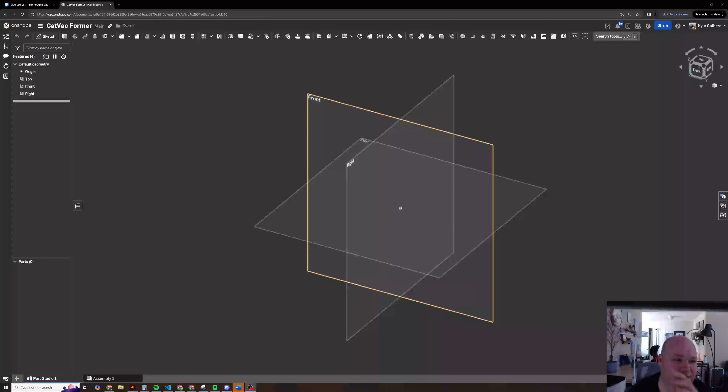Okay, so I'm recording myself. I'm going to model a vacuum former for the visors for the astronaut helmets. So I guess I can show you what those look like.

Alright, so if we go to the helmet assembly, so this is the visor. Oops, kind of see there.

And I guess I could pull some dimensions from it. So from side to side, it's going to be roughly 10 inches, and from the top here to the bottom here, it's about 12 inches. So in order to get a big enough bed that we're not right up against the edges, I'm probably going to design the vacuum former to be about 2 by 2 feet. That way, if we want to make them from smaller sheets, we can window it down. But if we want to make potentially 2 at a time, we should be able to do that with a 24 by 24 bed.

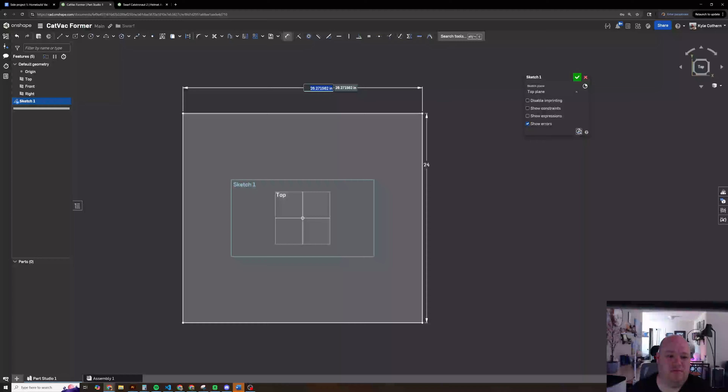So first thing I'll do is I'll model up the sheet that we would be forming. It's pretty easy, it's just a 24 by 24 by up to 1/4 inch sheet. So this would be 24. And then check that off. Extrude.

So this is the size of stock material that you'd be making it from, to give an example. There we go, we'll go ahead and change the material, make it polycarbonate.

Okay, so now that we've assigned the material, we can get the basic properties. So it weighs about 6 pounds, it's about 144 cubic inches. Cool, so it's pretty handy.

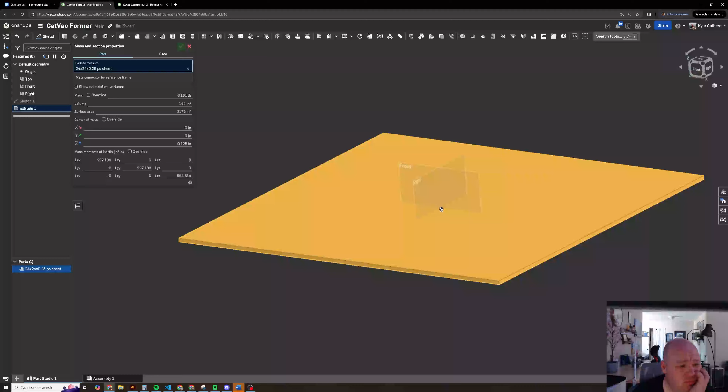So the first thing we need to do, if the material sheet is this size, we need to clamp it on the edges somehow. I guess we should put together some of the requirements for this. So I started a tab on this already. This will be how big of a sheet it can accommodate. We'll probably do a few different materials, and then we'll go up to 1/4 inch thick.

This could be thick enough that it needs to be heated from both sides so that it doesn't sag, or so that it gets thoroughly warm. But then if you have to heat from the top and the bottom, it can sag into the heating elements when it gets to the right temperature for forming. So some higher end commercial vacuum formers will actually pressurize the bottom side to take the sag out. That means the whole bottom enclosure has to be pressure tight though, which is maybe a little bit more than I want to do right now. That's going to add a substantial amount of heft because that's going to be a pretty big volume that you would have to enclose.

So I'm probably going to try seeing how thick I'll make it to where I can hold a 1/4 inch sheet, and we'll see whether or not I can get away with it when I'm doing the actual forming.

The other thing that's tricky with polycarbonate is you really need to dry it out before you form it. So usually when you do that, you want to hang the sheet vertically, like from the top edge, and put it in an oven. But I don't really have an oven that can fit a sheet like that. Or, well, I do, but making the fixture to hang it and everything is kind of a pain.

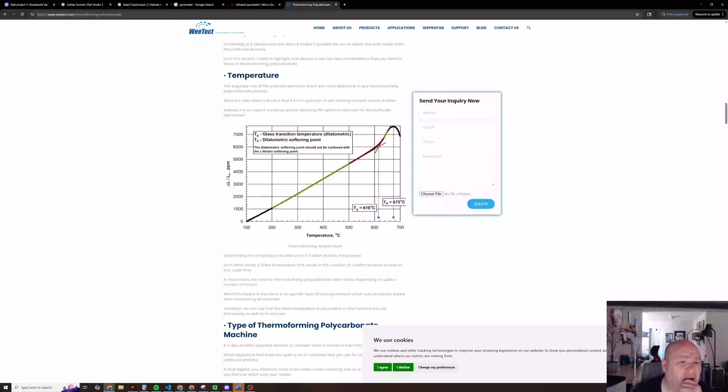So pre-dry should be 125 C, it says. Trapped moisture tends to form vapor above 250 F, making the vapor expand and create bubbles in the sheet. Dehumidifying air circulating oven. Okay, so we'd have to have some kind of fan.

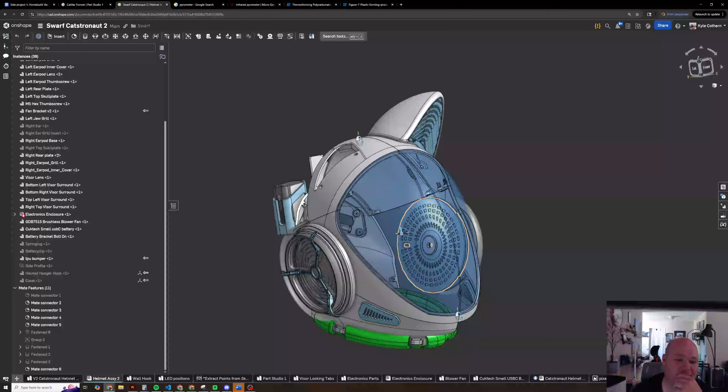To figure out the max mold weight, I'll just assume that this visor is one of the bigger things I'm going to be doing, which might be a bad assumption. But I'm going to make it anyway because I really don't want to over design the crap out of this thing.

So I made - oh, this is a different vacuum former. I made a mold volume, I think, at one point for the visor. If I just turn everything on, it'll probably show up. That's the lens, so this is how big I think the volume of it would have to be.

And I think it's like, let's see, it's like 15 by 15. And that's plenty big, so 24 by 24 is kind of overkill, but I think it's one of those things where if I'm going to go through all the process of building a vacuum former, I might as well make it big enough to do other stuff on it.

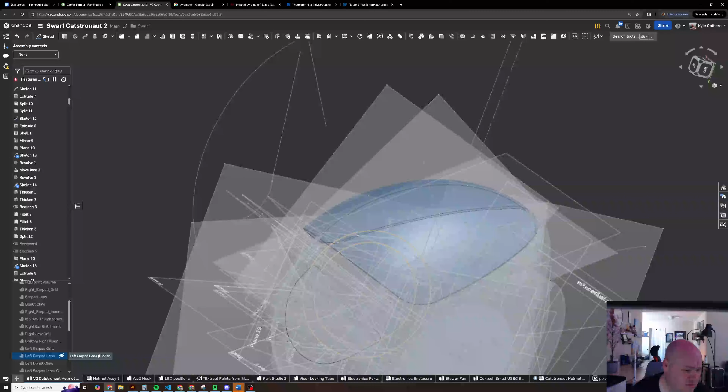Let's see here. I wonder if I can just show all parts and find it, maybe. Got a bunch of random volumes. Oh, maybe it's not in this one. I might have never made it for this one.

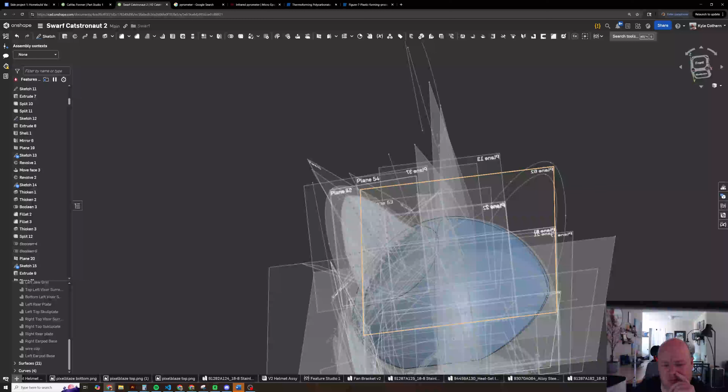Well, that's fine, I could just make a new one really quick. So what we'll do is turn everything off except for the visor, because there's a lot of stuff going on here. Hide other parts, go ahead and hide all the planes and hide all the sketches.

There you go. Here, for some reason, this must be like a composite curve or something. Hide all the curves - thought I hit all the planes. Must just be freaking out. Okay, so what we can do is we can make a... oh, I guess this isn't... well, that's kind of annoying.

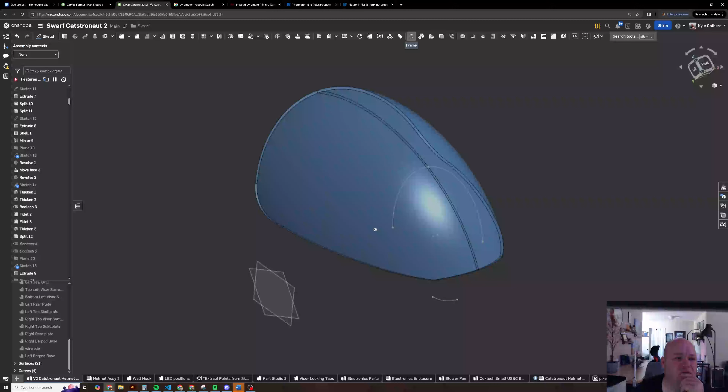So you can make part studios in context in here, but you have to be in an assembly. So one of the things - making assemblies and parts different is one of the things that's really unfortunate about both SolidWorks and Onshape.

Because when you have different file types, you basically immediately have this really awful problem, the fact that a lot of parts turn into assemblies and assemblies get merged together and turned into parts, and transitioning back and forth between those can be really hard if you've built up a pretty big feature tree and then you realize this needs to be a weldment. You pretty much have to start over in programs like this. In a program like NX, you can just merge them all together and a part is an assembly, so it doesn't matter, you're just done.

But it also makes it harder to do things like when you're cutting a hole through multiple parts, like match drilling something, which is very common.

Controlling that hole across the parts means you need to establish a new assembly context for a part. The way it works in Onshape is it's managed on an individual context basis, and you can update each context manually.

I don't know if any CAD program does this particularly well, but NX at least has something called WAVE link geometry, where you can do something like that and then break the link. That way you won't have someone accidentally update a WAVE linked assembly and have it cascade into all these other parts you weren't paying attention to.

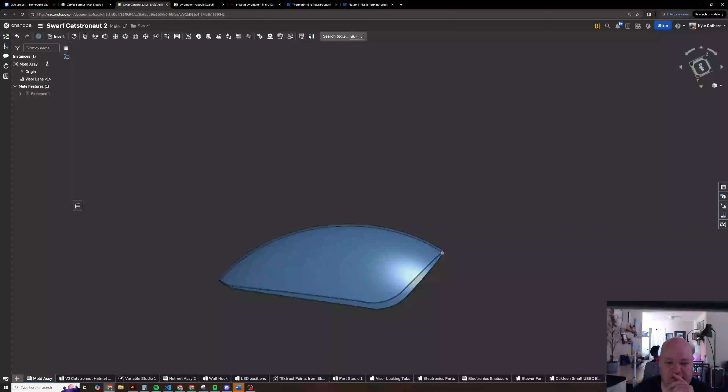So now that we have an assembly, we'll call this mold assembly. And since the vacuum former is kind of different from the helmet itself, I'm going to just make the mold in the Catstronaut file, then go back later and do the rest. So there's one question of where you put the flat part.

Like I could have it to where gravity down on the mold is this way. But usually what you want to do is find the center of whatever the biggest arc is and then go normal to that. That way it would be more like something like this.

The reason you want to do that is the plastic doesn't have to stretch as much, usually, if you're doing that. And the thing is, when you go to mold the plastic, it's hot so it yields and moves, but there's still some Poisson's ratio stuff going on where it wants to thin out in places seeing higher stress. Then you get an uneven thickness and optical aberrations effectively.

So it'll look kind of watery or wavy through the thin spots as they transition to the thicker spots. For something that needs to be optically clear, where you want to forget it's there, that's not good. So the smoother you can get the surface, and the more even and consistent the material thickness throughout the part, the better off you are.

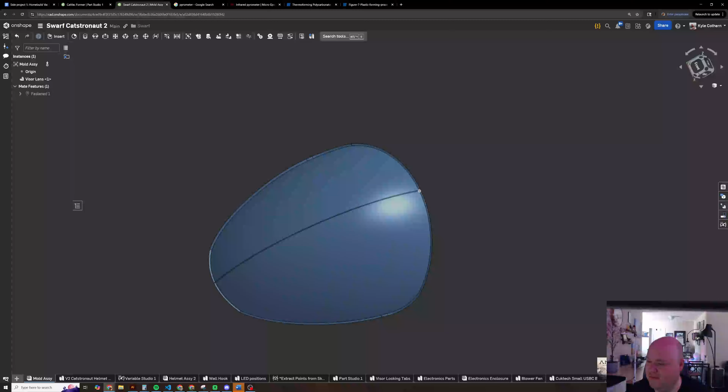So you kind of want as little stretching as you can get. Some things that can help: if you pressure form, it can do better at maintaining uniform thickness. Probably also really even heating. And I imagine your fixity method matters a lot—like if you're just grabbing on four square edges versus something more conformal to the actual shape of the visor, with additional material where there's going to be more stretch, that's probably what you want.

Okay, so to get that normal vector, I think I'm going to sketch. The first thing I have to do to create a Part Studio in context, usually you want to make a mate connector for that so you know what it's attached to. This one will be fine. And then we'll go ahead and create a Part Studio.

Oh well, I just did all that, so there we go. All right, so you can kind of see there's this ghosted version of the visor now. So I'm going to go ahead and sketch on the right plane here, and we're going to grab that curvature by using this edge here.

Look at that, it created the context. Great. So one of the kind of cool things about the constraints here is they have one that's just normal to curve, I think.

So we want to find the midpoint, which is probably like, whatever. We can just draw a line, and then we can just take this and say that it's midpoint of this. Midpoint. Oh, come on, this guy.

Oh, that's like a spline. They got me, nailed them. What about this? Pierce, we pierce that. Oh, some of the entities cannot be used.

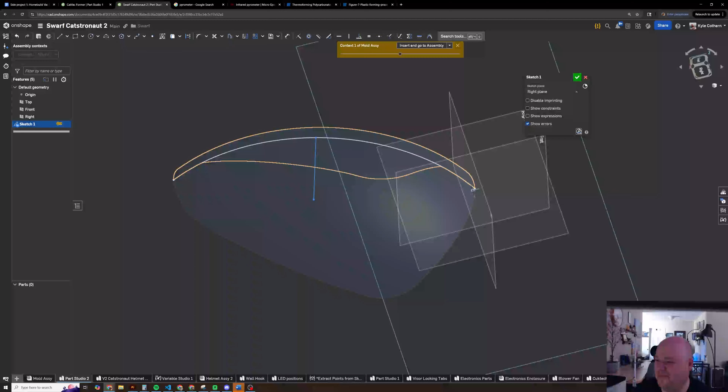So one problem with Onshape is it treats splines as a different class than lines and curves. In most CAD systems that are non-uniform rational B-spline based, a curve, a line, a point, it's all just represented as a Bezier curve. So like a spline is a spline, is a spline, is a line, is a curve, is an arc, is a circle, is a whatever. Like they're all defined the same way.

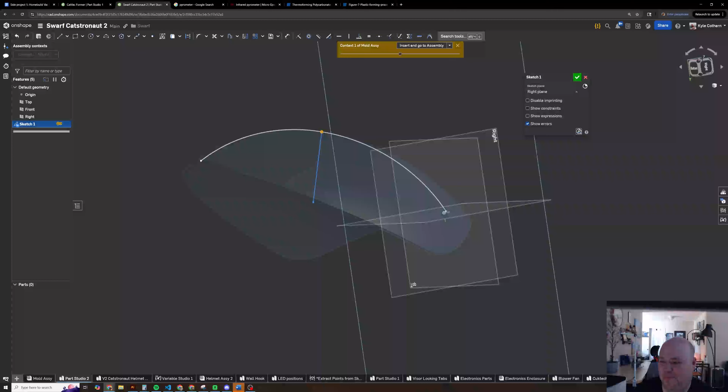Onshape has a different class of geometry for a spline surface, like anything that has complex curvature, versus just a 3-point arc, a curve, a fillet, a circle, a chamfer. Like all those are considered lines and curves, and then splines are this totally different thing. And a lot of the constraint methods and sketches and other stuff doesn't work on splines. It just works on lines and curves, which is frustrating as hell because I know exactly what I want to do.

So I can make this normal, like that works. But then if I want to grab the midpoint - and the thing is, a spline has a midpoint. Like, why can't it calculate the midpoint? Great question, come on guys. And the worst thing is, I could probably even - so yeah, it won't do a midpoint between those two.

So I could probably even just come in here and make a 3-point arc that very closely approximates this. Look at that, it's pretty close. And then I could just take the midpoint of that. But then that's not the real midpoint, which is really annoying. So there's the midpoint-ish, we could do that. So then this is like roughly the normal vector of the midpoint of this.

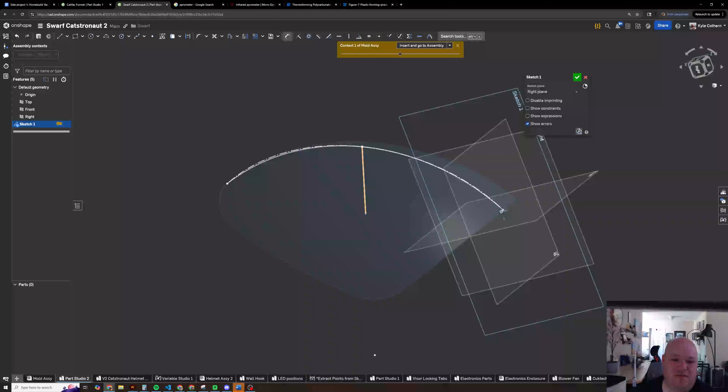And so what that lets us do - I'm going to go ahead and make the fake one a construction, just so I know it's not the real one. But what that's going to let us do is now I can set an offset distance. So let's say, I don't know, we want to go maybe an inch past that edge there.

So actually I'm going to kill that. Then I'm going to come down here and basically take a perpendicular line that is coming right to that edge there. So I think I can grab this edge, and I know it's a spline edge, but I should be able to do it coinciding. Oh man, see, so stupid.

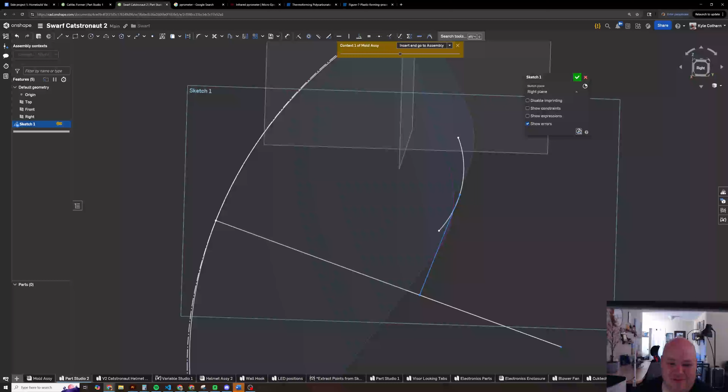It's like beyond stupid. Anyway, so it did something to attach it. Oh yeah, there we go. Okay, so I kind of have to - I wonder if I can make it tangent. That would be nice. Oh yeah, there we go.

Okay, so now we have some construction geometry here, so we can say, okay, how far off the bottom are we going to be? And I'll just go ahead and make this like, I don't know, let's make it 1.5 inches maybe. Yeah, that seems like enough.

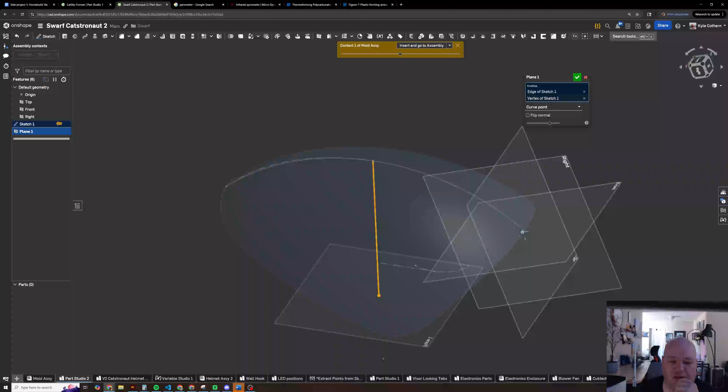Okay, so if we were to look at this dead on from the side, you can kind of see we're like 1.5 inches down. So we're going to go ahead and make a plane on that point - or sorry, actually I want a curve point. So like this is my curve, this is my point, and look at that. So this would be the plane of the base of the mold.

We can go ahead and sketch on that, and we can project these curves down to it of the edges of this guy. We actually want to make sure we get the actual edge curves and not just the interfaces, because there's actually a little edge face that would be pointed down. You can see my curvature is not entirely continuous, there is some interruptedness to it.

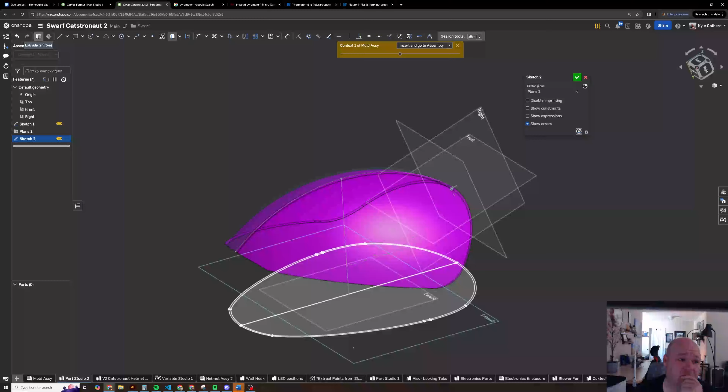Okay, so there's my base. So what I can do now, if I go ahead and check that box, I can extrude this base up.

It's probably a faster way to do some of this, but I'm just going at it. All right, so 1.5 inches. So this is just touching the bottom, right? Usually you want it to be... I'm trying to think. So like if we go to 1 inch, right?

We can do something a little bit interesting. So we'll go to 1 inch, and then, oh, I missed this segment. My bad. There we go. So if we go to 1 inch, we're the same size as it right now, but we probably actually want to be a little bit bigger.

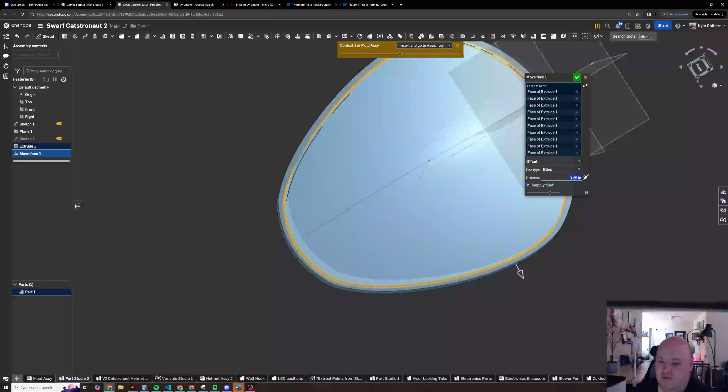So we can use, this is like synchronous modeling stuff, like we can move faces. So if we select all the tangent faces, if we make it like a 1/4 inch bigger or something, that just gives us some trim margin. So basically you want there to be a clear edge that you trim off, but you still kind of want a smoothish profile, because if you don't have some kind of draft or something like that, then it gets stuck on the mold and it drags when you try to pull it off, and it scratches the inside of it basically.

So we'll go ahead and offset that. And, oh God, what's this? This is like some kind of sliver bullshit going on here. I don't like it. I don't like it. What's wrong with you?

Is there like a very slight difference in these curves? I'm gonna hide this for now. Oh yeah, there it is. So fucking annoying. Okay, so let's go back to this. Why is there a difference there? Is there actually like a third little edge there? I don't see another edge there.

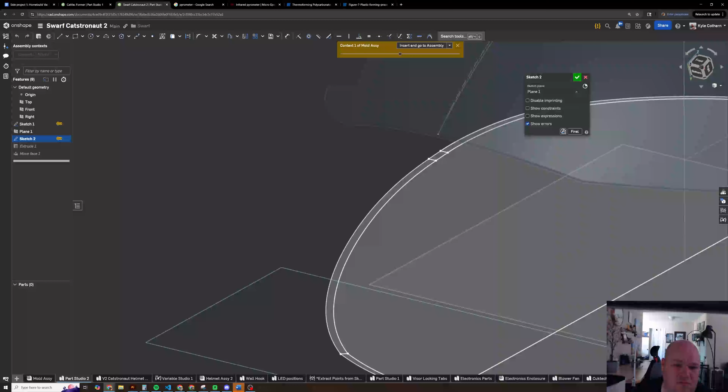All right, well, here's what we'll do. We'll go ahead and just delete the inner curves, because we don't actually need those. Those are just kind of not really helping us out anyway here. When you project, it's more of a pain to select every little thing that you want than it is to just say, here's the whole face, grab it.

Then you get these weird little geometry errors sometimes. And part of it has to do with probably how I designed the visor itself, but that was a while ago, and I'm not going to go back and redo that so that it's super clean. I'm just going to deal with the mess.

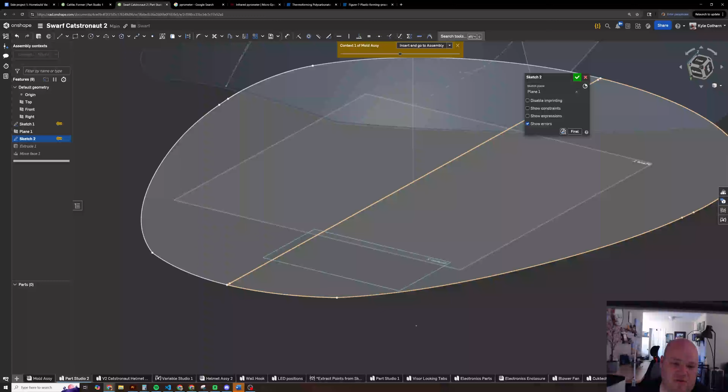So go ahead and delete all those internal curves so that we're not missing any little sections when we do the extrude, and this will probably break the extrude and I'll have to change it. But we will make this construction because we don't actually need the center line there. Oh, and there's a second center line, which is annoying. Probably because I did both sides. And we'll just delete and then we'll do construction. There's another one in there.

Anyway, overlapping edges. Yeah, and I mean, a lot of this clean geometry stuff, if you're really good at using the program, you'll always end up with clean geometry. But if you're like me and you don't use Onshape as much as you've used like NX, you get in these habits of doing it the way that you did in the other program, and they create little problems for you later, which is kind of annoying.

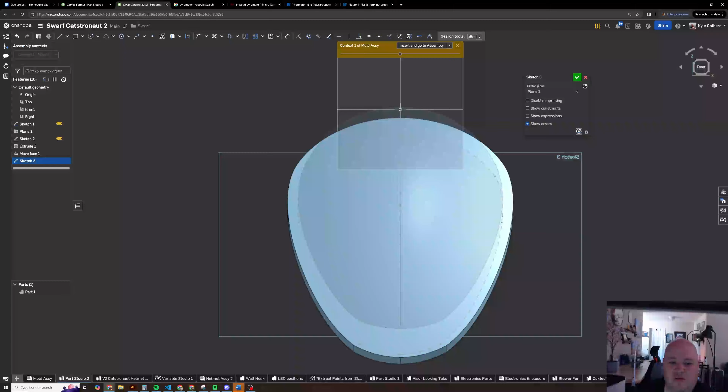Okay, so then we kind of have a nice little base here. Now it's probably a good idea to go ahead and make a bounding box of this, because let's make a bounding box on this plane, because it's good to know how big of a piece of aluminum we're going to have to buy.

Oh, that's interesting. Is that not? Oh, I guess this isn't looking at front. Oh wait, no, I'm confused. Oh wait, yeah, okay, that's fine.

So we're gonna have to make this out of a piece of aluminum, and I don't want to spend a lot of money. So if we can make it out of something that's like a reasonable size, this is like 11.5. So we probably need a block that's like 12 by. Can I fit it in 12? No, that sucks. Oh wait, can I fit the visor in 12? Oh, I totally can. Ooh, but it's just barely. That's probably fine. So we have a 12 by 12 block.

How high does it have to be? So like from here down to here.

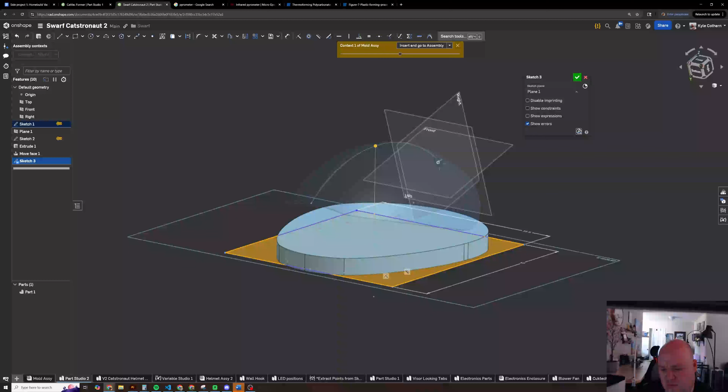6 inches, so 12 by 12 by 6. Aluminum planks or billet. Let's see, 12 by 12 by 6. Oh, 12 by 12 by 2, $420. Holy guacamole.

How about these guys? I need a big old chunk. Oh, these are all architectural bullshit. I mean, really, I'm going to go to IMS and look around the scrap area to see if I can find something, but that's a pretty big piece of scrap.

Oh, there it is, 12 by 12 by 6. Oh, that's an enclosure. Well, anyway, I'm not going to. The internet's the worst place to find material. Or it's like a pain in the ass.

Okay, so 12 by 12, it'll fit on the mill. Getting the material is a little bit more of a pain, but we might be able to trim an inch off and get a 12 by 12 by 5 or something. Finding the exact piece might be a little tricky. It might be closer to like you get a bigger piece and then back down. But anyway, yeah, it does seem doable.

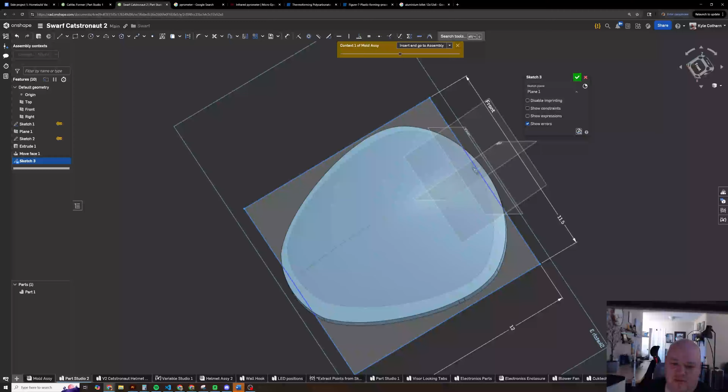So what we'll go ahead and do, just to save ourselves a little bit of headache, is that gonna fit? Oh yeah, it'll definitely fit.

So I guess I should probably make this actually centered so that I can use it to trim the base. Oh, what is actually, oh, cool. All right, go ahead and do that. And then I'll just trim off the front and the back where that is, because I don't want, I'll just make some trim surfaces here.

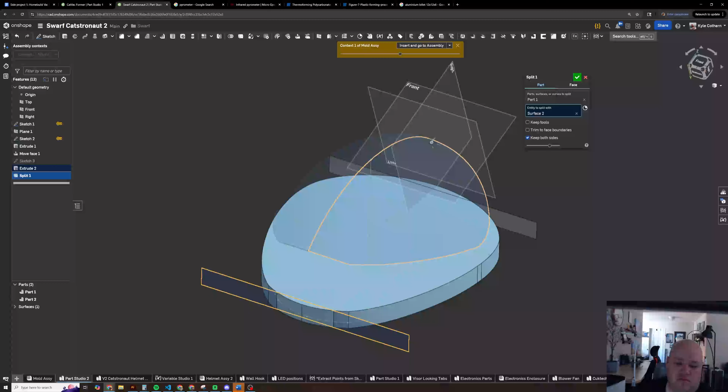Hooray. Take those little surfaces, and then we just split this, split with this. You do keep both sides. There we go. Perfect. And then we can do that the same on the other side.

So I might end up redoing this mold just based on what material I can find, but for now this will be the starting point that we're just going to assume for the vacuum former. Okay, cool. All right, so now I kind of have like a base. So the first thing I need to do is add a draft to that, because right now there's no draft and that's going to suck.

So we'll go ahead in here and we'll pick this as the neutral plane, and then we will draft. We'll select tangents, this guy, get the tangent there. Oh, god damn it. There we go. And then we got one more. Okay, so you kind of see when you do the draft, it leans in a little bit.

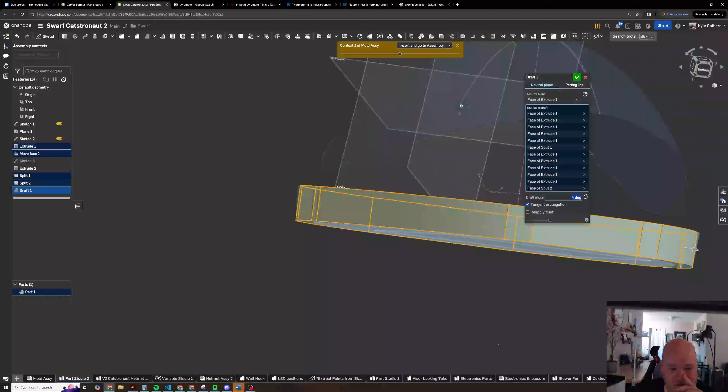We'll just go ahead and do like a 4-degree draft because, oh wait, is it going? Oh, it's leaning out, I'm going to go the other way. There we go, leaning in. Yeah, 4 degrees is probably fine.

I mean, we could go more. It's not, we got plenty of margin on the edges there. That's kind of why I did the offset so big. It looks more like this. Yeah, why not? Let's do like 6 degrees or something.

So what I should do is I should set up a view that looks straight down this and save it off, and I think there's a way to do that in here. Maybe it's like, I don't know, I guess we could search save view. Oh, that, I don't know why I put Onshape.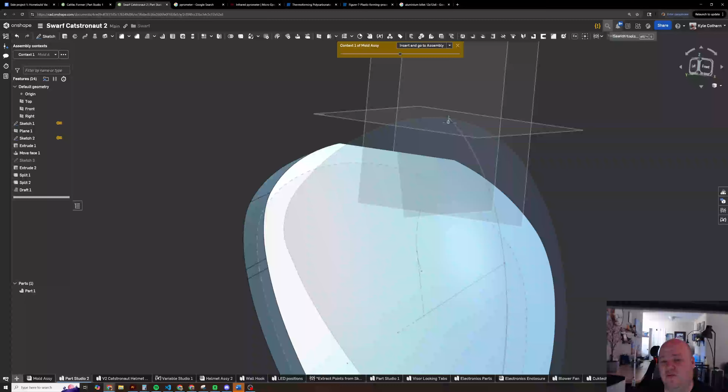Oh, well, that's not super useful. Oh wait, that's searching through the feature studios, that's not the actual help. Oh fuck, the internet's gonna be better at this. Save view Onshape.

Named views. Let's see. Line view to curve Onshape. View combination of features and tools.

Use the view cube and key. Face of the part containing the N key. Select the curve, align the view. Use the view cube. Face you want an end. Oh, okay, so I just need to go normal to that face.

And then I can go view tools, name views. Okay, so if I do, I've never really done this before. Named view. No, it's not in there. That's not super helpful.

Search tools, named view. Totally worthless. Oh wait, maybe it's over here on the appearance panel or something. Duration. Let's see here, help. Named view. And views. Oh.

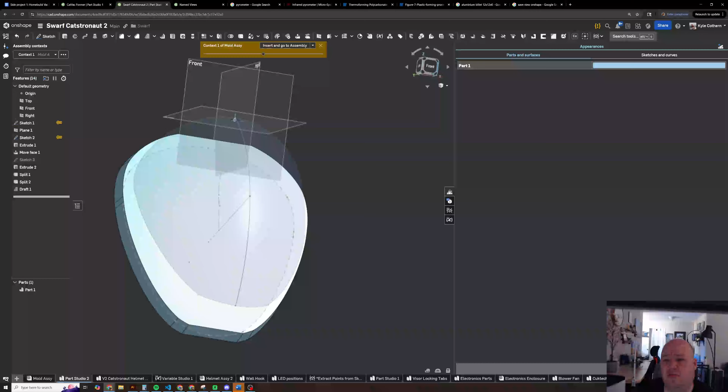View tools menu. Oh, it's there? I didn't see it. Maybe I'm blind. I'm blind. There it is.

Okay, cool. So I should be able to just click on this face, hit the N key, and look normal to it. And then I can come over here and do named views, and I'll call this top mold view. Then I can do stuff over here and get back to it. That's cool. All right, nice, that's all I needed.

So now that I can actually look normal to that and see, I still have a little bit of margin. I'm just checking to make sure that even with the draft angle, I have some margin on where that edge is, because I don't want to go off the edge of the material.

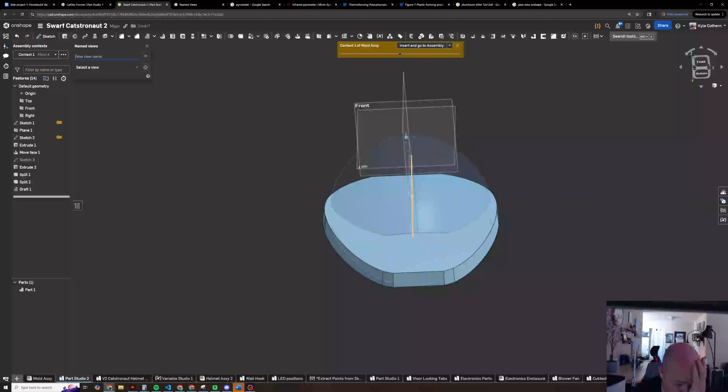So the next thing I'll do is extrude this top surface up until I hit at least that line. Let's go ahead and do a solid, and pick this whole thing. We're not going to do any draft this time, just go straight. Let's say 6 inches. Probably fine. Yep, that's fine. Okay, cool.

So now we just need to chop the top off. The easiest way to do that, I've found, is by hiding this guy and then creating an offset surface on the inside here, like that.

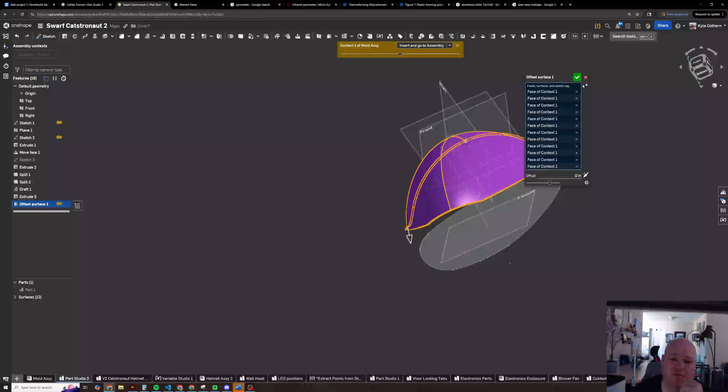That's not offset at all, but we'll actually grab these edges too because they matter. You matter, edges. All right, I'm gonna go ahead and get the rest of these guys back there and there and there. All right, cool, so now we have a surface, and we can go ahead and hide the visor.

Oh wait, did we hide the visor? Where's the visor? Oh, okay, we're just looking at the context, so we can change the context to nothing. Now this is just a surface.

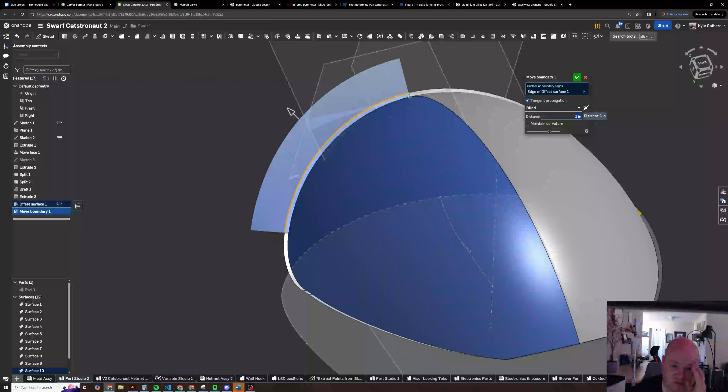If you notice, because we grabbed those edges, that's actually where the trim line should land, right? So if you're molding it, you want to come out a little bit from where the trim line is, like this. So we can move the boundary out a little bit, and this will move it tangent to the surface. We only really need to do like maybe 1/8 of an inch, not a lot.

And then what we're going to do is the harder thing, which is to extend it back in the same direction as this guy. And I don't know how I'm going to do that. I haven't figured that out yet. Okay, so there's that.

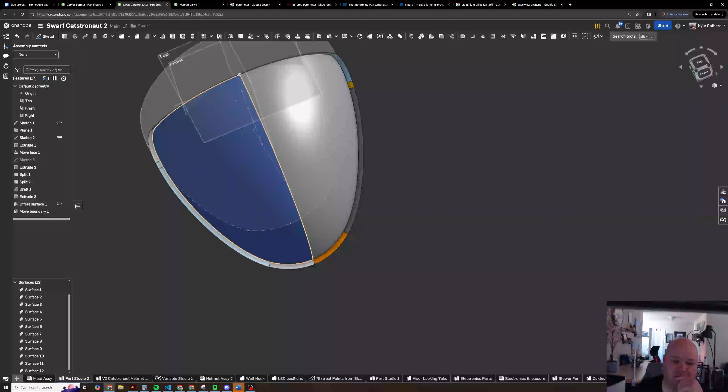I guess what we could do is just measure one of these curves. That's 0.246. So are all of these 0.246? 0.243. Okay, so maybe we just pick the shortest one. 0.243. Let's check this one. 0.243.

Okay, so now this is sort of like the top, but we don't actually want the inside part of this. We just want to make a move boundary on the outside of this guy.

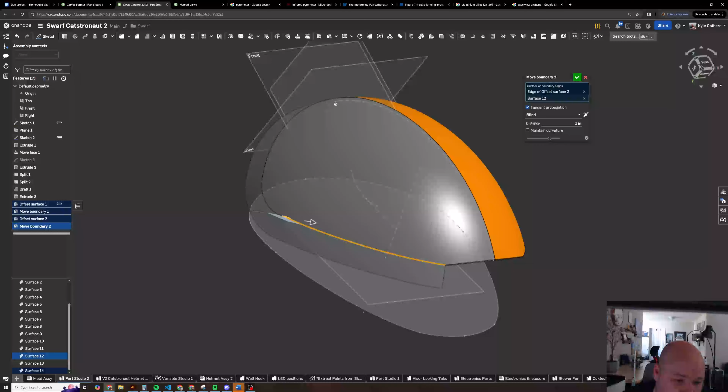Can I just actually, you know what, undo that. We'll just pick that whole surface and this whole surface. Cool, so that is there.

And now, how am I going to trim that? So now what I want is just this skirt over here to cut the bigger part, and I don't want this inside part.

I wonder if I can split that the way it is. It might. I don't think it actually fully intersects it though. So if I split this and use these guys, yeah, see, it doesn't fully intersect.

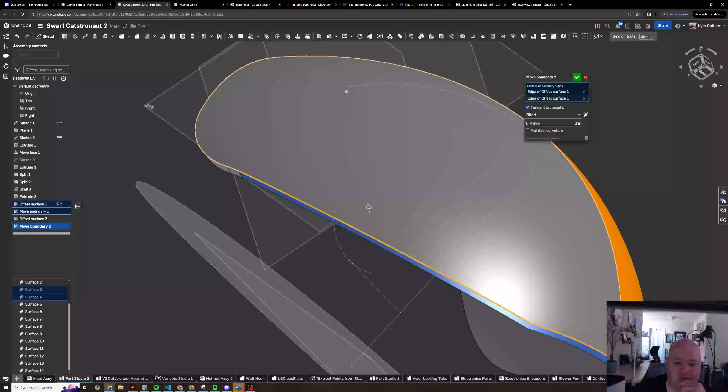Oh, you know, actually, when I do that move boundary here, I shouldn't pick the whole surface. I should pick edges, just the outside edges. Oh, no, I don't want those edges. Get that. There we go, okay cool.

That works. Okay, so that one, and then I wonder if I can just do both at the same time. Nope. Oh wait, no, it's doing that thing again.

I also don't like the other object selection tool in Onshape very much. Okay, so this might work. Oh well, maybe not. Oh wait, no, I can turn these guys back on.

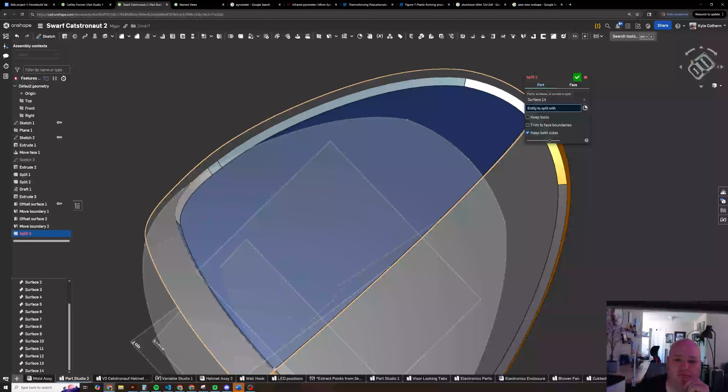Okay, so then I just need to split this guy, and I want to use this guy and this guy, this guy and this guy and this guy. Oh, it doesn't let me.

It doesn't let me pick more than one face. That's some hot garbage.

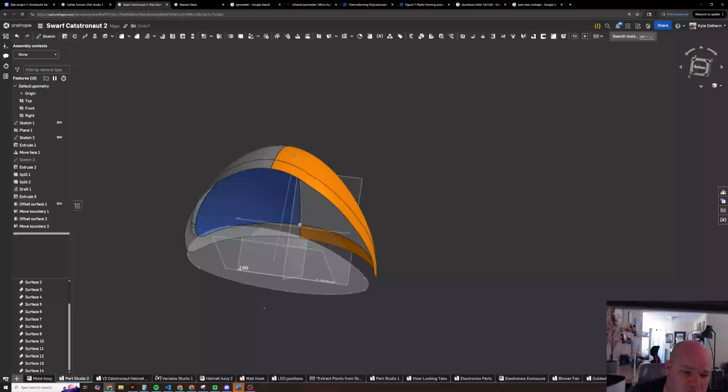All right, so what do I gotta do here? I wonder if I can merge those surfaces together. Is there a... there's no sew feature, I don't think. Oh, you know what? Maybe it doesn't matter. Yeah, I don't think it matters.

Okay, so now we go back to our part, and you can see that kind of intersects it. We need to go a little bit further to actually get all the way through it. So we're gonna amp this up to like 1.5 inches. No, we want it to go all the way through, 2 inches. Oh, that's unfortunate, but okay, it's acceptable.

Unfortunate, but acceptable. Okay, so what we're gonna do first is split this by this. Oops, oh no. Oh bother. Can I do face? Oh no. Oh man. That's one thing I really hate about this, is it doesn't...

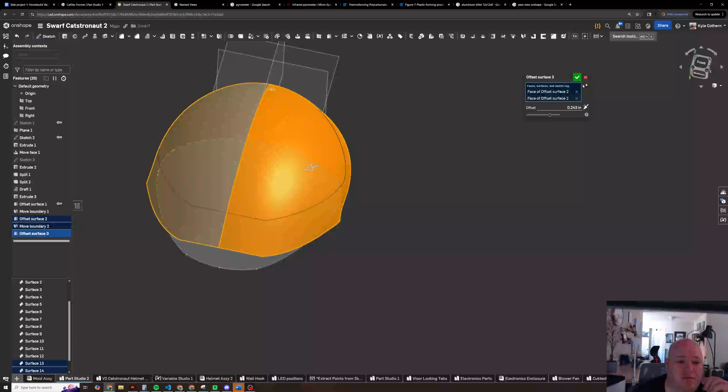So I guess we could maybe do an offset surface and make this one surface. Okay. Yeah, that says it's one surface now.

We split part 1 by offset surface 3. Damn it, this surface, no. Why aren't they the same? They should be the same. So stupid. Oh man.

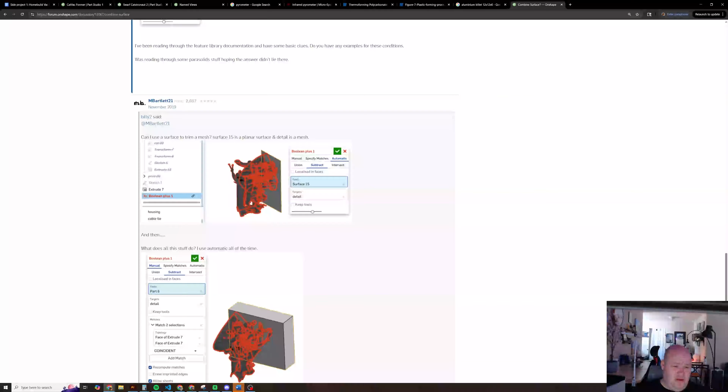Let's see if there's like an OnShape merge surfaces feature. Okay. I don't want to use a feature script. Oh, god damn it. Oh, maybe just a Boolean does it.

Bingo bango. Well, the Boolean didn't fail. Oh yeah, there it is. Okay, so now...

Split part, entity to split, with surface. Bam! I don't want to keep both sides. That's fine. Oh, I guess we turn the part back on. Okay, cool.

So now if we go ahead and hide these guys, because they don't really matter anymore. So many extra surfaces, but whatever. Okay, cool, so now we have part of a mold. The next thing we need to do is split the mold, basically need to carve out.

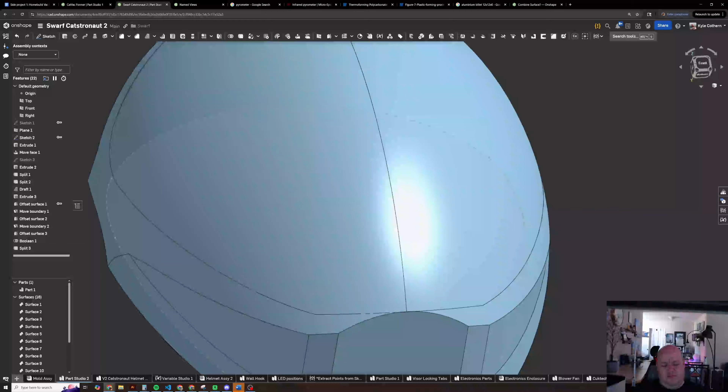I wonder if I could just offset. Oh wait, no, those aren't really split faces yet. Okay, so we're gonna go ahead and split this guy, and we're gonna use... oh, it's too many surfaces, but what I might be able to do is do an offset and then offset them all in one. Or, oh, I can Boolean them all together.

Boolean. Boolean. Okay, one more, two more. Don't fail me now. All right, cool, we did it.

So now we made that, and now we can just kind of pop the part back on. See how long this takes? Holy crap. All right, so we're gonna split that guy.

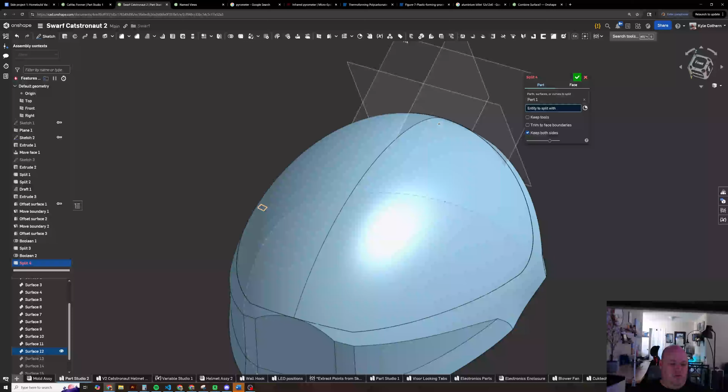We're gonna use the Boolean. We don't want to keep both sides. Look at that, we're trimming like nobody's business. We'll just hide all these surfaces because we don't really need them. There we go. So there's our mold.

So one note here is what'll happen is it'll suck down along this edge line. We'll actually want there to be holes that go in around here. Otherwise it won't draw in very well. But we can put some holes in there. It shouldn't be too bad.

The other thing that's kind of tricky is with this specific geometry, you're not actually going to have a sharp edge here - there's just no way. That'll come from trimming. So what we'll likely do is offset that a little bit. This sharp thing here is some bullshit too, that's probably not going to work, so I'll have to round that out a little bit.

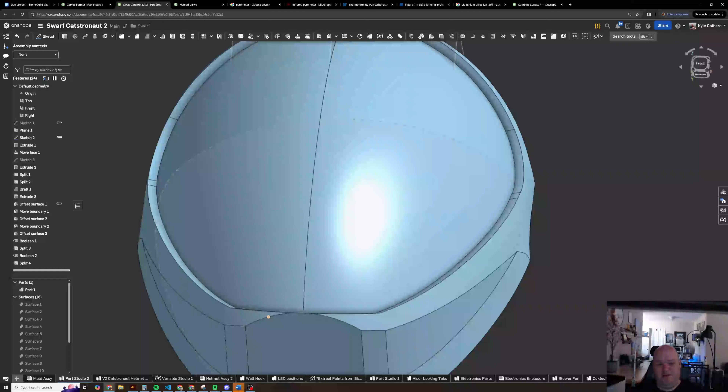But the other thing that's a little funny is I don't really have mounting features in this visor yet. I probably should have some. So it might make sense to have some locating holes or something like that I can either drill after the fact, or at least have a visual indication of where they should be in the mold. But this is a good starting point, kind of gives you an idea of maybe what it would look like.

So there's our kind of janky mold that's sort of representative. Might actually need to get a longer piece of aluminum to do this, maybe like a 12 by 14 or a 12 by 16, but we'll see what's available.

It could also be that I make it from a couple pieces of stock and then just bolt them together and machine them after they're bolted together, and hope that the seam... or never take them apart. But it does go through heating cycles, so it would be nice if it was made out of one piece, and not a bunch. So anyway, this is our mold V0.

So the next thing I'm going to do is pull that into our vacuum former model. So we have a part studio, and we'll just call this material. And then we'll call this our mock-up assembly.

CatVac. I'm calling it the CatVac because it's for the Catstronaut helmet. So okay, let's go ahead and put in our sheet like that, and then we're going to go over to the Catstronaut, and there we go.

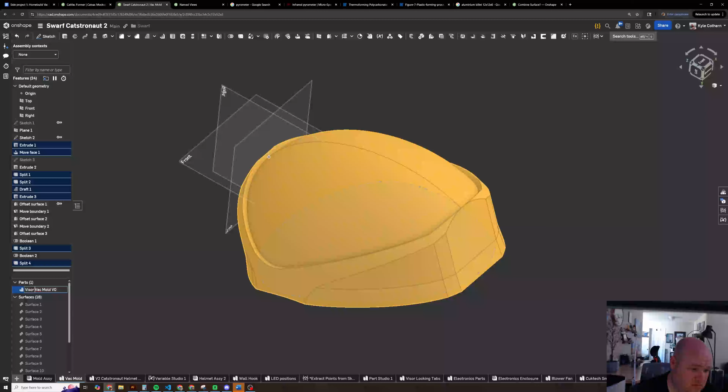Oh yeah, I guess it was in an assembly. Oh yeah, I should rename this. So we're going to call this mold. That mold, okay. Call this that. Oh you know what, actually, visor. Because I will not know what vac mold it is.

At some point I should probably also mold the little lenses that go over the ears and stuff, because I don't know. This is the helmet here, actually, that we're making this visor for. So I guess I could. Ah, there you go. There's ones that actually have the LEDs on them up there, but okay.

So let's go back over to the CatVac former, and we're going to go here. I guess we have to create a version. Create.

And close that. So one nice thing is you can just sort of close windows and not worry as much about things saving, because it just always saves. The downside is you might accidentally screw up some feature, and then trying to figure out how to get back to a version that works could be a huge pain.

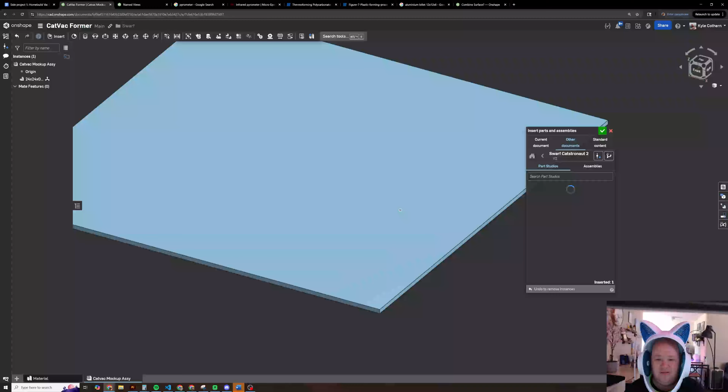All right, so we're just going to grab that sheet, and we should make this transparent or something, because it's not actually going to be that appearance. One thing that kind of sucks is the appearances aren't tied to the material properties per se. I'll do like a blue. There might be a way to do that, but by default you have to assign them independently.

Okay, so I'm pretty sure I was working on Swarf Catstronaut. It's funny that it takes so long to load the parts list. The BOM table shouldn't have anything to do with the complexity of the parts themselves, unless it's trying to generate the previews. Oh yeah, it's trying to generate the previews still. Okay, so there you go, here's that.

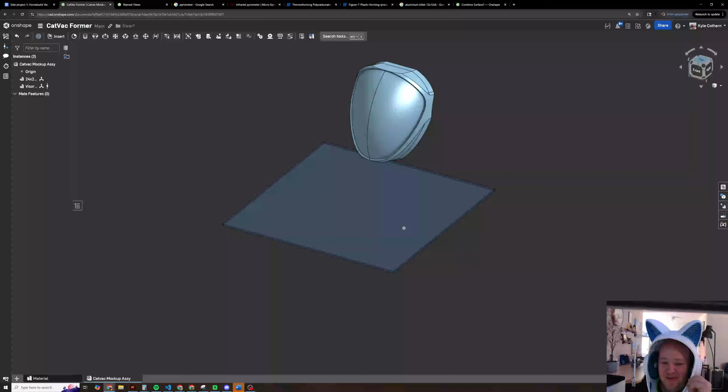So we'll go ahead and mount this guy. Actually, we'll make the origin of the material at the origin, and then we'll put this guy. There's a bunch of ways we can do this. I'm not going to do any constraints for it right now because I don't see the point, though one or two might help just to get it aligned in a way that makes sense, but whatever. I'll just put it over here for now. Okay, so something like this, like that.

Okay, oh fuck, that's my coffee all over my lap. I'll be right back. Ooh, should have drank the coffee faster. Whoa.

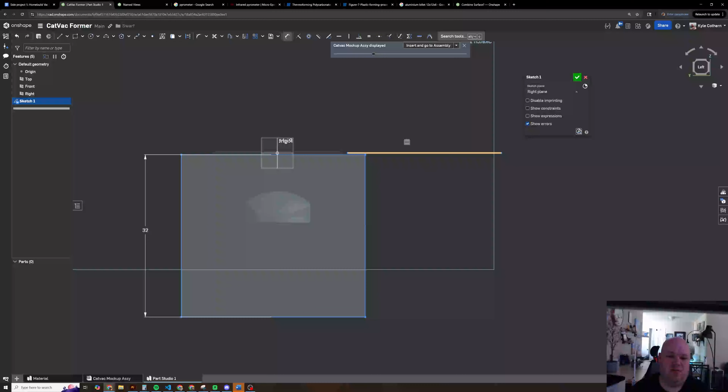Then we need an oven that's at least the same size as this, so it's going to hang out over here. Let's say it's maybe 6 inches wider, so like a 30-inch oven. So the oven actually needs to be like a box like this.

And it's got heating elements that go in and out of the page, like little quartz tubes usually. So let's just say we've got some tubes, and we'll just throw them in there. This isn't supposed to be exact, but you get the idea—these little circles represent tubes.

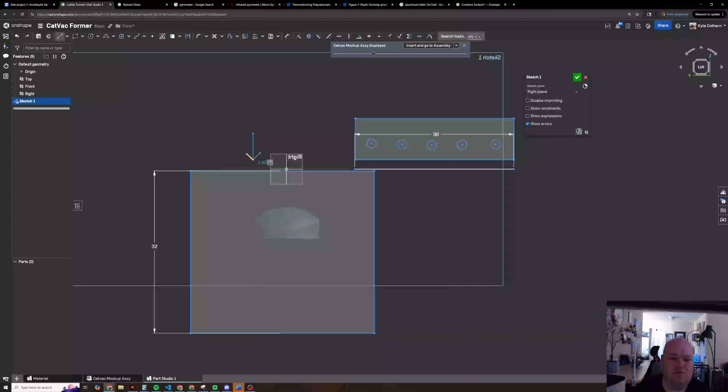So basically what will happen is you'll put the sheet down. The sheet will come from space and go down, and then there will be some kind of clamping mechanism that goes here and clamps it down to the box. We'll call it some kind of clamping mechanism for now, and that will go all the way around—the little clamps—and it'll also be in and out of the page.

So you have your little clamps that come down, and you'll put your mold in first, then clamp your material in. Now this is after it's been dried, so it might make sense to have the drying oven just over here on the right—you dry a piece and then move it over. Or it could make sense to do the drying on this side and then move it over. I'm not really sure yet, gotta think about it.

But you need fans for that. So if you're going to do drying, you'd probably have some kind of fans up here somewhere, maybe like big blowers.

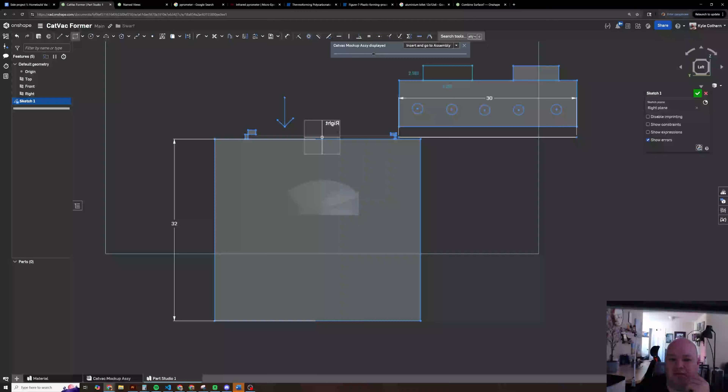So anyway, now once you've got it dried and clamped in there and you have your mold down here, right, then you're going to want to heat up the plastic until it gets hot enough. And when it heats up, it's going to sag—so you're going to have some kind of saggy thing like this when it's all done and warm, probably like that or something.

So your mold can't be right up against the bottom, otherwise it'll sag into it, and then it'll get cold where it touches and bad stuff will happen. So in order to get it hot to make it sag, you have to have the oven placed over it.

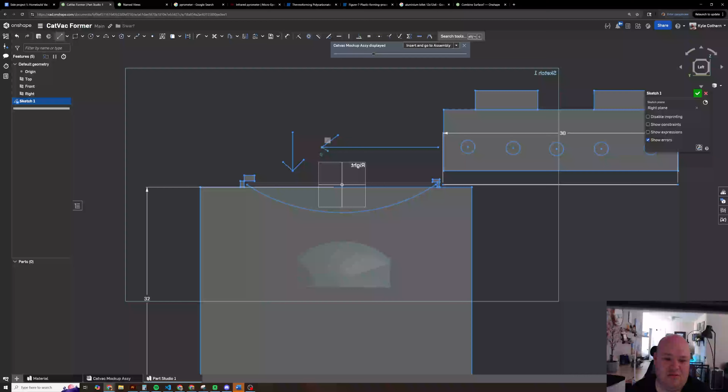So you put the oven on some rails—this is actually a common design for these things. You put it on a couple of linear rails and slide it over, so the oven ends up over top of the sheet, like this if we just mock it in there. We'll put little dotted lines here so you know it's not there all the time.

So anyway, it goes over, it sags, and then what you do is you have some kind of—sorry, I already messed it up—okay, so you have some kind of platform that brings this guy up.

And it's got to ride on some kind of rails, so there'll be something like this that it rides on, and basically you push this guy up like that.

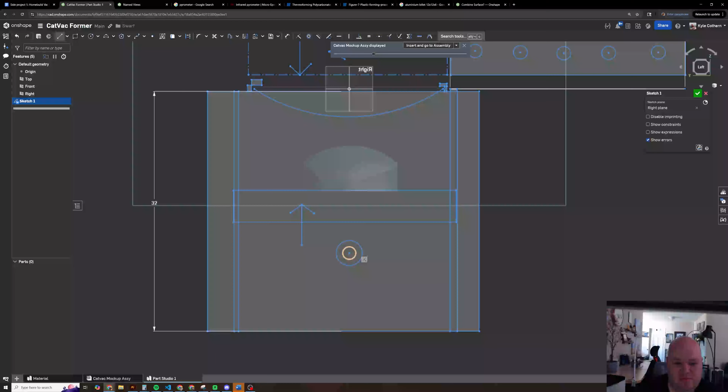Usually there's just a big lever, kind of like a slot machine. So you'd have something like this maybe, or either some kind of cantilevered thing or some kind of mechanism—I haven't really figured out how we do that.

Oh, I guess the person probably can't stand where that is, so the person's probably standing over on the left. So you have a big long arm that comes out there and a big old lever, like this or something—let's just say it's like that for now. So this lever would move in some kind of arc like that.

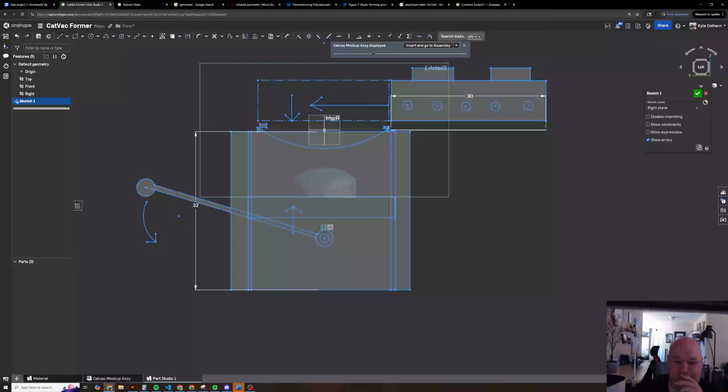This isn't drawn to scale, but you get the idea. The pivot point could be way up here or somewhere else, I don't really know. But you swing the lever down, the platform goes up, and then there's usually a face seal about here, like an O-ring that goes all the way around.

It's probably like a Viton thing, or just like the kind of seal you have on a door in your house, that foam rubber placed all the way around, because it just needs enough to get the vacuum started. So this seal slams up onto a sealing surface here when it's all the way at the top.

And then you've got a grid of holes that go through this thing. So it's kind of like this, little holes, and that's oversized here—it would be much smaller in reality. But you get the idea, there's a whole grid of holes across the entire platform.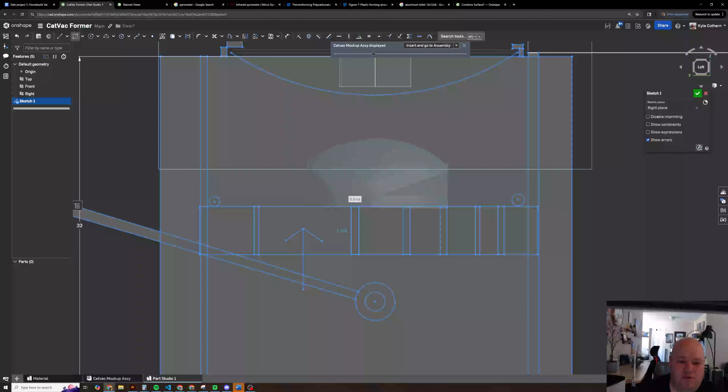You basically want to pull vacuum through those holes to suck the material down onto the mold as it goes up. So you'd also have little tiny holes in your mold that don't necessarily need to line up, because you'd have a little cavity at the bottom of your mold so all the holes are kind of manifolded together. So the inside of the base would be hollow like that, and you'd have a port on the bottom somewhere.

You hook up a shop vac to the port, so the air goes out this way, and you leave the top open to the atmosphere.

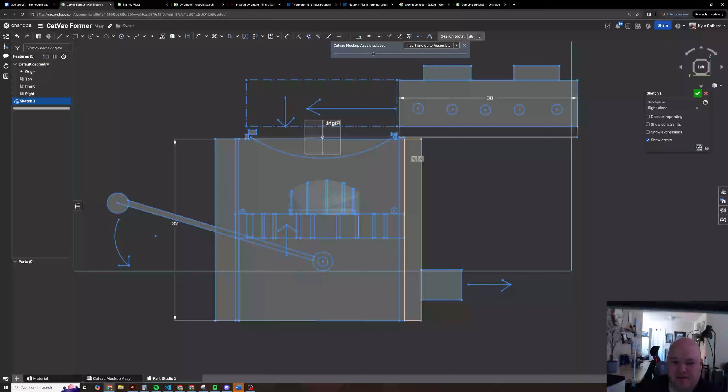What happens is the mold goes all the way up, the vacuum sucks the rest of the material down, and you end up with a part stretched over the mold. The heaters have been removed, so it's cooling rapidly, and once it cools and hardens, you undo your clamps, pop your plate off, and trim the excess.

If the plate were actually 24 inches, you could probably get a couple out of that with the size this one is, or maybe even 4 if you're really pushing it. But everything about how the plastic drapes around the edges really determines this—you might need the mold to be a little bit bigger to get a clean part out.

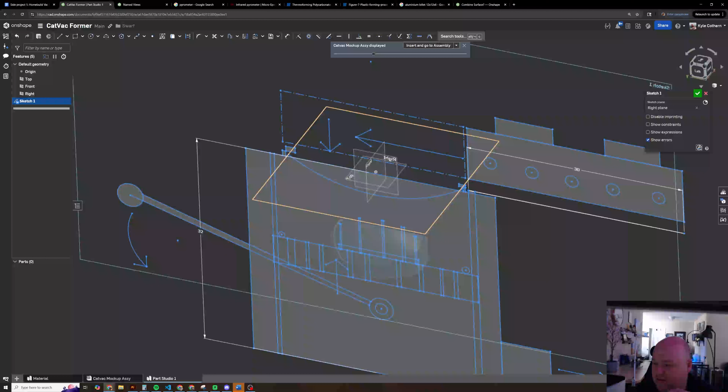And that's fine. The other thing you can do is add a smaller window of clamps down, like basically a smaller square than this. So you'd have maybe a 16 by 16 or 14 by 14 sheet of polycarb, windowed down to the center, and that window just supports it out in the middle.

So that's another thing you can do—you design your machine to do the full size sheet, and then add that tooling later to do smaller sheets and save you on waste.

So then there's a bunch of questions, like what do we make the frame out of? What are the heating elements? What's the blower? If you're going to dry the sheet in the oven, what does that look like? You probably want that to be indirect heat.

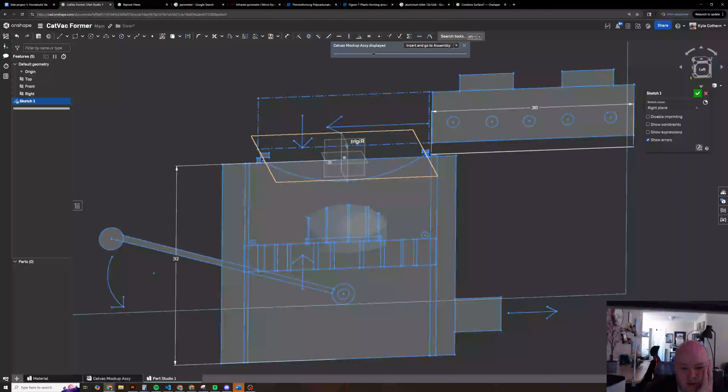It's also my understanding that you want the sheet to hang vertically for that. So that could be something where maybe we have a little slot over here, and we just have some kind of duct. Let's say we have a big slot that the whole sheet can fit in.

It could just hang from a little clamp at the top—a little clamp for the sheet, like that or whatever. And it kind of slides in from the side.

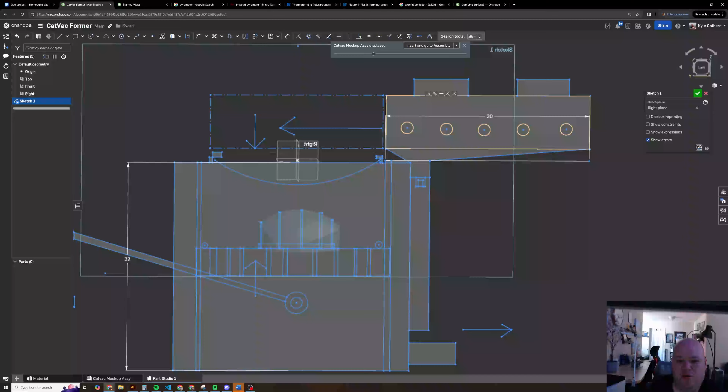And then you'd make some kind of funnel thing over here that doesn't move with the oven, it's just fixed. When you blow the hot air, you basically heat the air in here, and there's some kind of deflector plate or a couple of them that keep the radiant heat from going directly in, like insulators effectively.

But you still allow for some airflow. Basically you would use these blower fans, blow the hot air in this box down across this guy to dry it out. And you just run that for a while.

And then when that's done, you pull the sheet out, stick it in the clamps over on the other side. It would even be nice if you could already have most of the clamps on the sheet when it's in this slot, and then you just pull the whole clamped sheet out of here, and it just drops onto pins over here.

And then you would bring the oven over and heat it up until it gets to its glass transition, or I don't know, I don't think it's actually the glass transition point. I think it's like a softening point, annealed effectively, like with metals. You get it to that point.

Part of the thing too is that's where you might have a pyrometer, or I've seen little sensors that are over here, kind of. And that's tricky because you got to make sure they don't run into your platform, so they might have to be further over. In our case, you might actually have the little sensors be here, and you just know how far it's supposed to sag based on what kind of sheet it is.

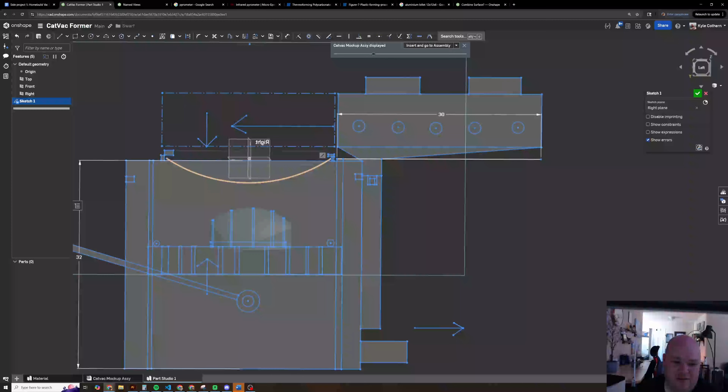And once the sag breaks an infrared beam or something, then you go, oh okay, now there's enough sag, I'm good to go. A little green light comes on, and then you shove the oven out of the way and pull the platform up, right?

Now, one thing you got to be really careful about is if you have a big manually operated lever like this and it's not pneumatic or motorized, some asshole is going to push the lever down while the oven's still over here and smoosh the plastic into the heating elements, which is not what you want. So you need some kind of interlock that won't let the stage go up unless the oven is out of the way, all the way.

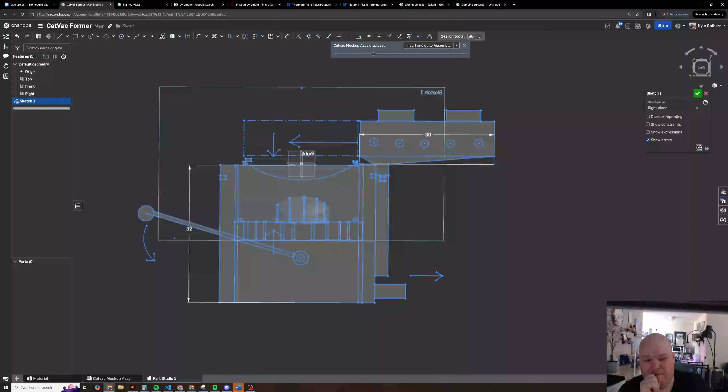And that's probably just a mechanical interlock. I'd have to think about how to design that, since that's a bit of a mechanism. You don't want to wreck your oven accidentally, especially if you're going fast and trying to pump a bunch of these things out, and you have an unskilled operator potentially, like an intern or something. It's good to make it idiot proof if you can.

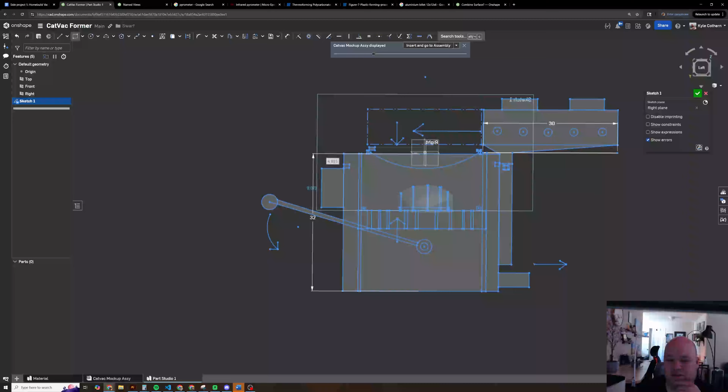And then, you know, for your operator controls over here, you probably want some kind of controller box on there. It could also be on the oven somewhere, depending, though you don't want it to be on the oven per se because that's going to be hot. It would be nice if it were here because then you could have your little operator console thing here, and that's where you could set your temperature, your time. Maybe if there's sensors, it could tell you how hot the sheet is, or that the sheet has sagged, it's time to go, right?

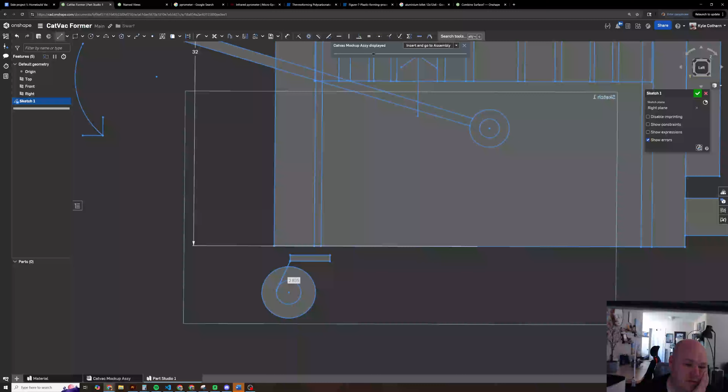And then it has to fit in my garage somehow, so we're probably going to put wheels down here, I'm guessing. Something like this, I don't know, just like a little wheelbase guy. So we'll want caster wheels on the bottom of this or something so that it can roll around, so it's not stuck in one place, you know.

So yeah, this is my rough plan. Now's the part where I'm going to go offline, spend some time trying to find components, because a lot of this is going to get made from off-the-shelf stuff like McMaster, Grainger, anywhere I can find the heating elements and the controller stuff. And once I put a bit more of a BOM together, I'll come back and actually start modeling things. I'll probably put all the vendor parts in first that I know of or think I'm going to use, and then I'll come back and lay everything out.

And then once it's all laid out, I'll do a first pass at a frame and any kind of enclosure, and any custom brackets and stuff to hold things together. So probably anything that holds it together, and then the enclosure.

One thing that's a little tricky is, if this thing is getting shop vac on the bottom, does this whole bottom hold vacuum, or is there just a hose that comes up to a manifold that rides on this plate, so that we're not pulling vacuum on such a large volume? The other thing that might happen is we might have a vacuum pump and a roughing tank.

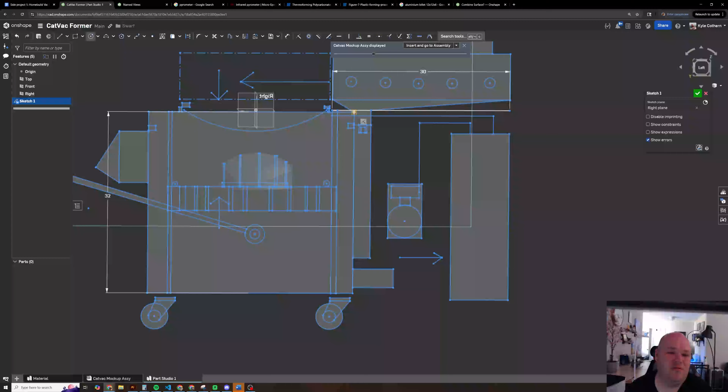Let's just say it goes to there or something, and then you have a big valve on here that you'd crank over to one side. I'll draw it down like this. You have a big valve here that you'd crank over, and that's how you pull hard vacuum at the end.

So basically you still use the vacuum cleaner as the roughing pump to get most of the volume out. Then as soon as this thing hits the top of travel, you want to open to this high vacuum tank to really suck the rest of the air out of there.

The value in that probably depends on how close the vacuum cleaner gets you, and how fast it gets you there. Because if it's within a PSI of vacuum, you're not really going to get much more force out of adding that second tank.

But if you're only getting halfway to vacuum or a third of the way, and you're pulling maybe 5 or 10 PSI, then it's really nice to have that booster reservoir, because that helps. An extra 5 PSI is huge - you only get about 15 PSI from the Earth's atmosphere unless something really horrible has happened, like 14.7.

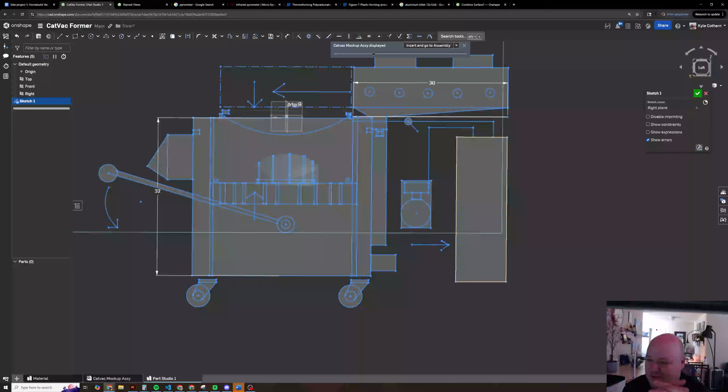So the only way to get better definition and push into every little crack of the mold is to have a pressure lid that goes on the top of this thing. But then if you've got 6 PSI in a vessel that big, that's a lot of stored energy.

So it's okay if it implodes. It's not okay if it explodes - that means it's coming out towards you.

So that's sort of the tricky part - you don't really know until you start fooling around with the specific geometry and materials that you're using, without doing a lot of simulation. And I don't have any tools for simulation, so I'm probably not going to do that.

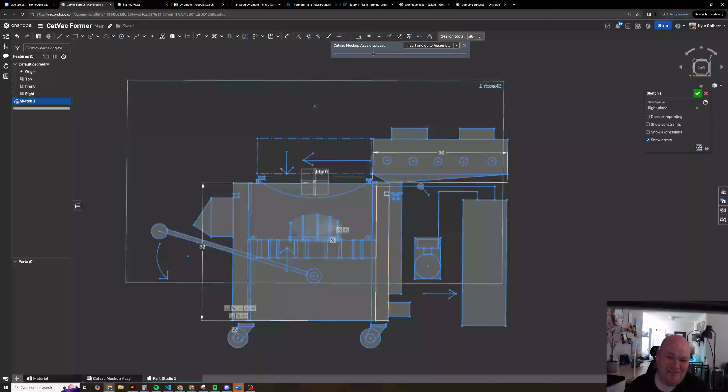So this is sort of a starting point, and we'll go from there. Obviously there's some structure missing here - there need to be some linear rails and something to hold this oven up, and we want to make this out of sheet metal if we could, and just angle iron that I can get cheap, because I'm trying to save money with this thing.

What you make the bed out of is probably pretty interesting - you want something kind of lightweight. I've seen some cool expanded PVC foams that might work really well for that. I had a friend who's got a big sheet router who could help me out with drilling a thousand holes in one of them or something. But yeah, we'll see, it'll be interesting.

So stay tuned, and I'll do another video once I'm a little further along with the design.